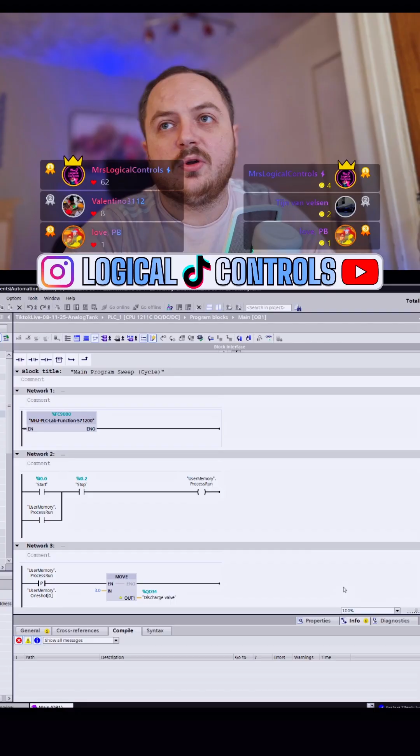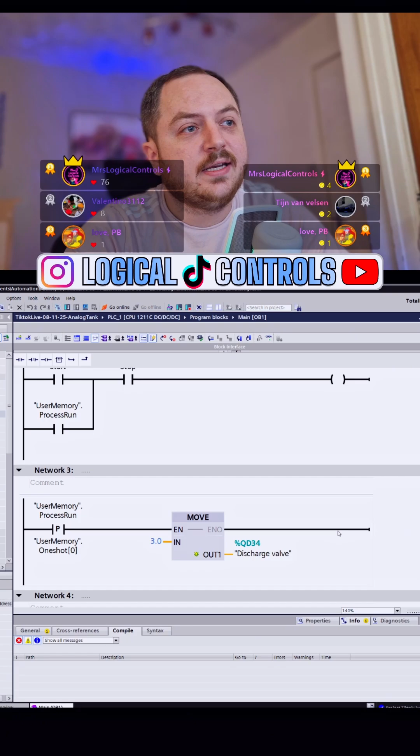So what I've done, obviously we've got factory IO running - not that view, this view. Yeah, so we've got it running. I've also got TIA portal in the background with the Siemens program. Let me zoom that in a little bit so you can see better. This is the program we made last night. After like 2 hours of trying to get the PID to work, we gave up on it in the end. But there's a reason why it didn't work, and the reason is PLC sim. So while we're talking about that, let me run PLC sim, because I haven't got it running yet.

It wouldn't work, and there seems to be some sort of bug with TIA portal. One of the followers, Paxir Electric I think he's called - Paxir, I'm not sure if I'm pronouncing that right - but he found out the reason why, and he let me know. So I really appreciate that.

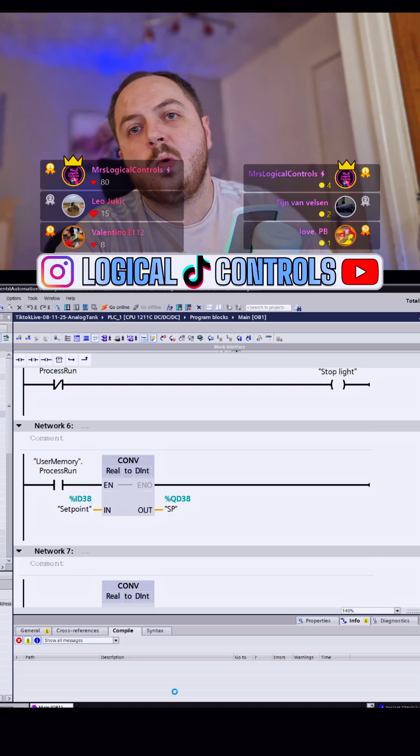So let's run up the sim. Connect. Let's load. Start module.

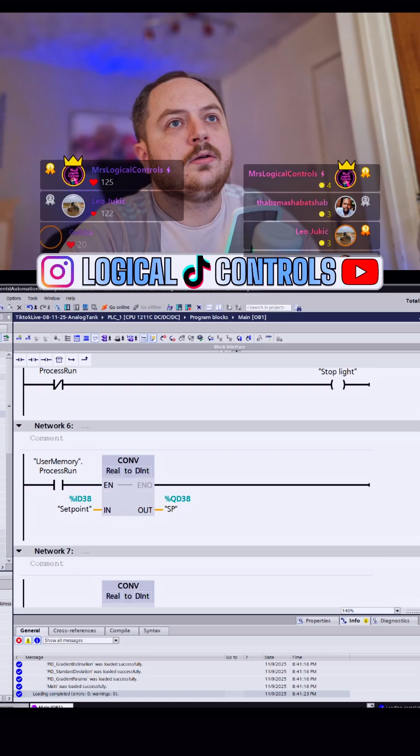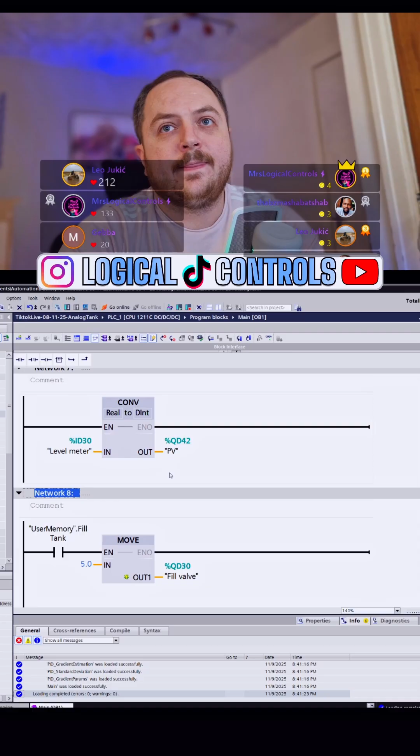Appreciate that. So Paxir, he found the solution to why it wasn't working last night. Last night we just ended up doing some rough control just to get it working, just to put a pin in it. But tonight we're going to bin this off and actually do a PID this time. And I have tested it, so I know it does work.

There's a few things we've got to change in here though. So we're not going to need that. We're not going to need that. We're probably going to change this - I want to scale it properly. And we'll probably change this as well.

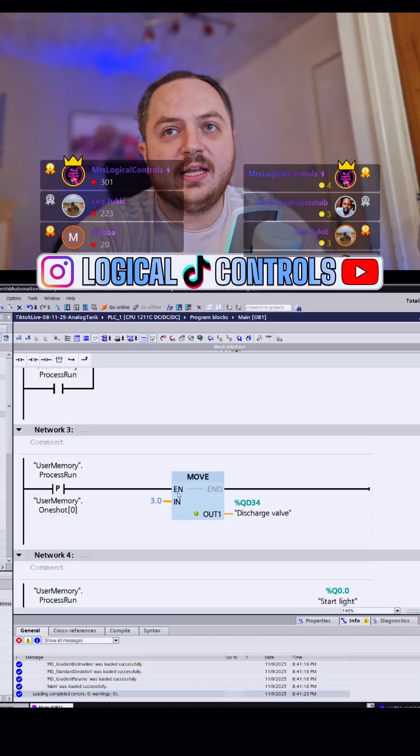Right, so this here, we're going to leave that - we're just going to have a constant discharge. On the sim, there's this drain hole down here, with a valve on it to basically plug it or unplug it. We're just going to leave it 30% open, so it's constantly draining, same as what we did last night, no different. But tonight we're going to get the PID working. We didn't do that yesterday, and it was a bit of a thorn in my side.

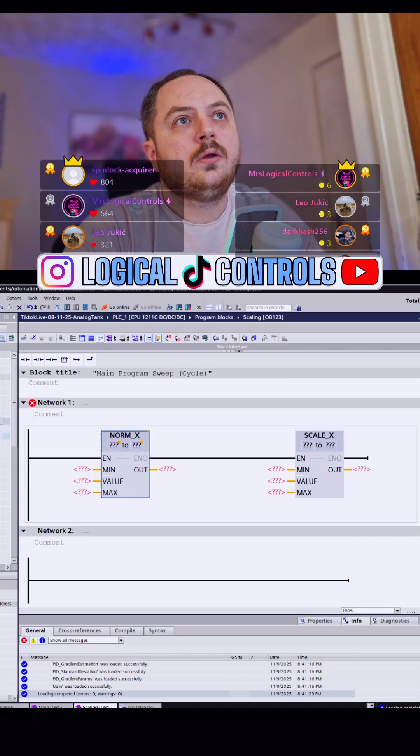Right. And it's a real, we're going to keep it as a real. The minimum is going to be 0.

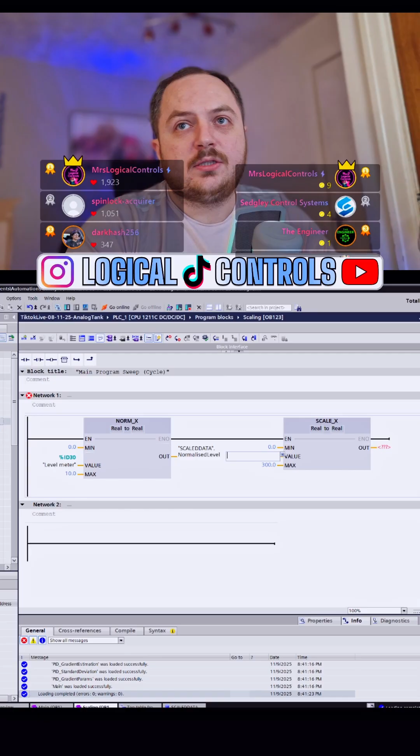Right. Let's maximize that. Okay, so yeah, that gives you an idea of what we're doing. So this one wants to be normalized value, scale data, normalized level. There we go. And we're going to put that into scale data, scaled level.

This value in this box is going to be - you can't see it again, hang on. Can you see that a bit better? I've obviously messed around since last night and I've got the view not quite right. Right, I think you can see all that now. So this scaled level variable, that's going to hold the value of 0 to 300 now.

Which ties up with the scaling of the actual tank, which I'm assuming is like, I don't know, 300 centimeters or something, or 300 inches. I don't know what the actual scale is, but yeah, that's the height, I guess - the height of the... Oh, it's centimeters. Yeah, so it's a 3-meter tank.

Okay, so we've scaled that.

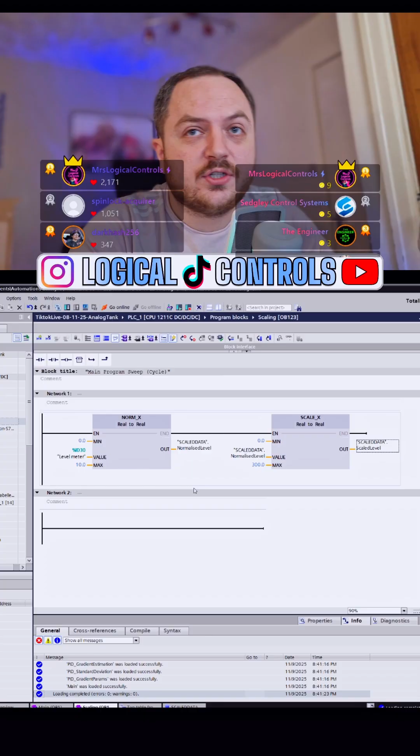Yeah, it's centimeters. I'd call that set point value. This isn't the set point, mate. No, this is the feedback from the level meter.

So let me just copy that so we don't have to do it all over again, and bin that one off. So let's call that one scaling of the level meter. We're going to call this feedback for PID.

This one's going to be scaling of the set point for PID. We want to change that so it's not level meter anymore. It's, excuse me, set point, which is also 0 to 10.

That becomes set point. That becomes set point, and that becomes scaled set point. That probably doesn't actually want to be 0 to 300.

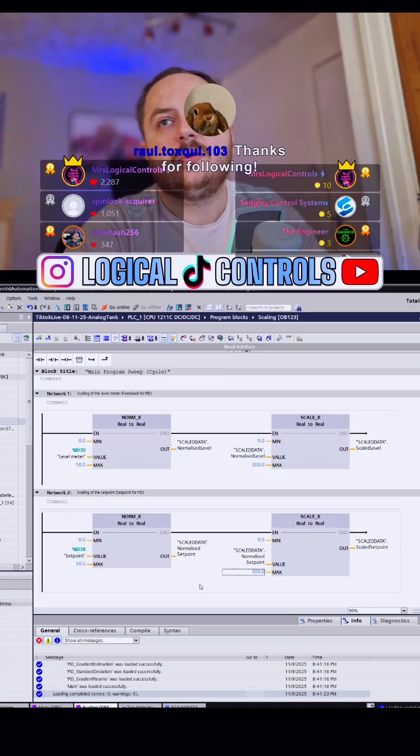No, we'll leave it. We'll keep all the variables for the PID the same scale.

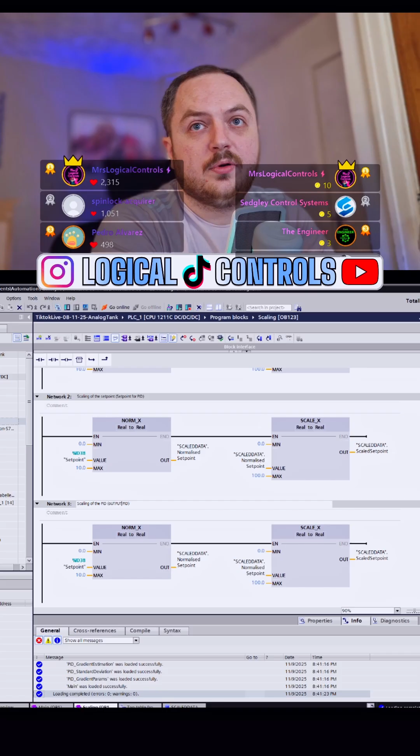So let me copy that, paste that. This one's going to be scaling of the PID output. It'll be 0 to 100 because the actual PID gives out 0 to 100%, or at least that's the way I'm going to do it anyway. This is the output from the PID, scaling of the PID output. I guess it's a little obvious what I'm doing, but I don't have it yet, so let me just take that out for now.

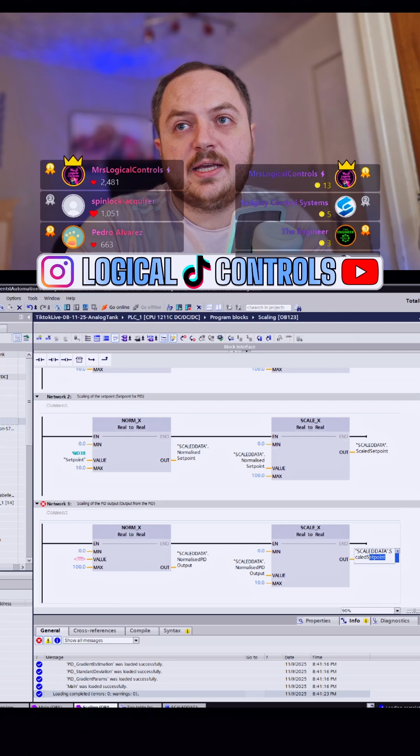This is going to be 0 to 100. We're going to make it 0 to 10 because that's what the fill valve requires - it requires a 0 to 10 signal. We'll call that one normalized PID output, and scaled PID output - not set point, there we go. We'll leave that blank for now because I haven't added the actual PID yet, so I just don't have it.

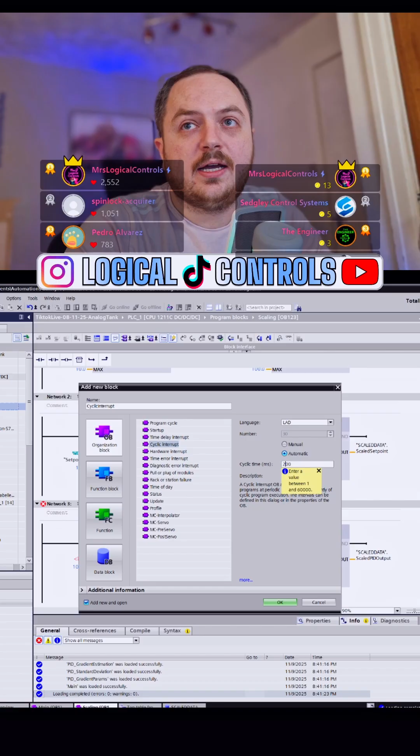So let's add a new block. For the PID, that wants its own OB and it wants a cyclic interrupt. Earlier I had to set that to 200 milliseconds because I was getting errors at 100.

Okay, so we've got a nice new block. This is going to run every 200 milliseconds. Over on the right, I don't know if you guys can see that - let me pull it across. We have some blocks, and one of them under technology is PID control, so I can open that up.

The problem I have, or the problem we came into last night - we're using the compact PID, that's what we're going to use, just because I think that's the easiest one. I'm not entirely sure what the others do.

The problem is this says V6 here. We were using - oh, you can't see it, let me pull it across a little bit more. We're using version 6, that's the latest version of the compact PID. That does not work with PLC Sim at the minute, or at least it doesn't appear to.

So what you need to do, and what we didn't do last night, I would have never known this - I'm not like a TIA expert or anything, I'm only just kind of learning this stuff. Apparently version 5 doesn't work. I don't think version 4 works either, or at least the one I was told by Paxir Electric was 3 works, and I have tested this. So I'm going to use version 3, and that takes the actual block itself to version 1.2.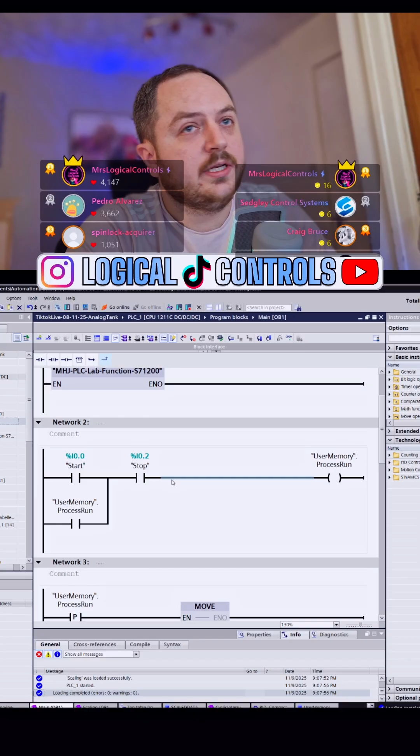Just to show you what process run is. Basically, we've got a start button on the control panel, we've got a stop button, and we have the process run bit. When we press the start button, it's basically just going to latch in, and process run's going to keep running until we press the stop button. The stop button is physically a normally closed contact, so we have to use a normally open contact in the ladder.

As I said, I maybe should comment some of this stuff. So this is the control start stop. This is our constant tank drain. So like I said earlier, the drain is going to drain the tank with the valve being 30% open.

Which country am I from? I'm from the UK, mate.

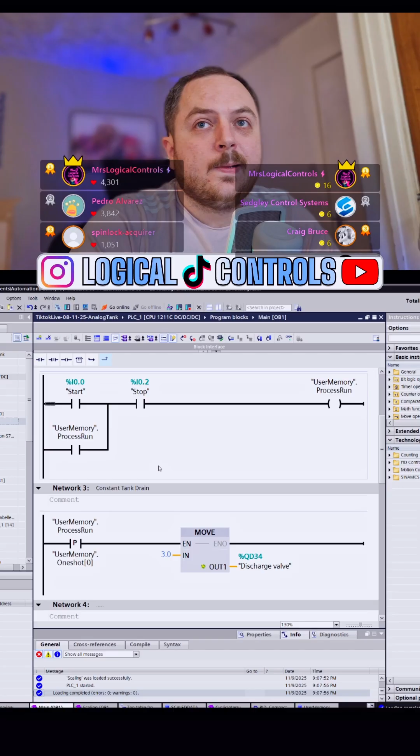How should I start learning PLC programming? I've got a whole video on that that I made a couple of weeks ago, called Low Cost Methods for PLC Programming or something like that. Have a look at that, Robert. I could tell you all the information now, but there's visuals to go with it.

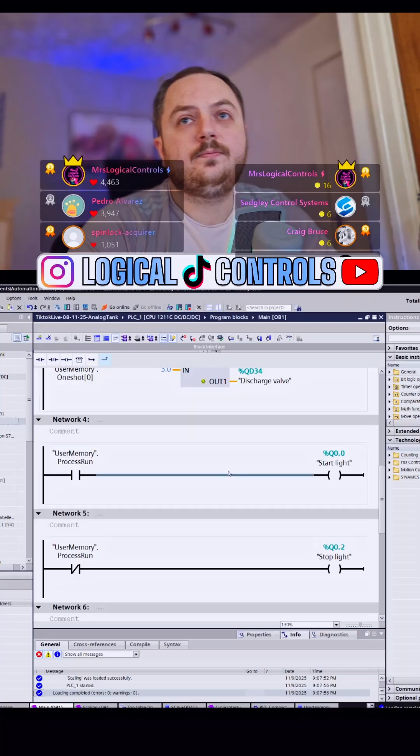Okay, so yeah, that's the constant tank drain. Just to remind you, the tank has a drain hole, it has a valve attached to that. So if that valve is fully closed, nothing drains out. We're going to leave that valve 30% open, so we've got a constant drain, because the PID is no good unless there's some sort of force acting on the system. So we're just going to have a constant drain, so we'll be able to maintain like 50%, 60%, whatever we set the set point to.

Okay, so this bit here was just basically for the panel start lamp. This is for the panel stop lamp. The panel stop lamp in Factory IO is totally rubbish, it's a black lamp, you can basically never see it come on, or it's very difficult to see. This white one will get a bit brighter.

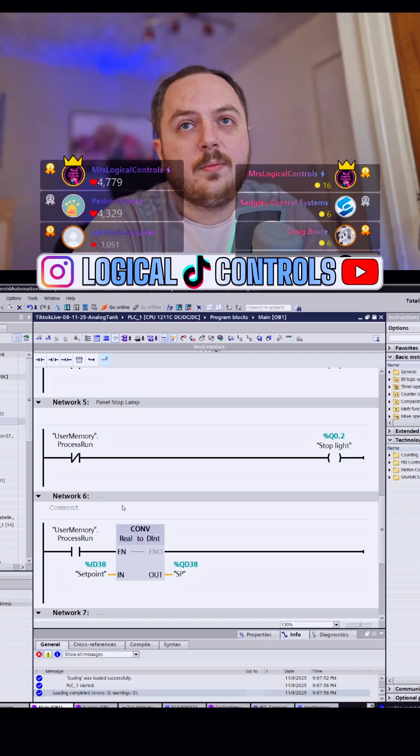Okay, so just to give some comments to this logic that we've done. What was this? This was basically, we're going to change this, but I'll comment it anyway. This is for the SP meter readout on door. I'll show you what they are for. What was this one? PV meter readout on door.

We'll change this because I never really liked the way I did this yesterday anyway. So we've got 2 meters on the door, SP, PV. SP is obviously the set point, so this will give us a digital readout of what the set point is set to. The PV is the actual level that the tank is. So for now, we'll leave them as they are, but we are going to change them. It's a bit of a minor thing, it's just more scaling, really.

Did I make this simulator? No, I didn't, mate. A big company made this, I think they're called Real Games or something. I think Factory IO started off life with the intention of being a game, and then they realised they could make an absolute shed load of money by selling it to industry. It's not free, buddy, no, it's not free. You can buy it on a subscription, so you can pay a monthly fee of £28, which, or is it euros or something, which isn't cheap. Or you can buy it outright for like 700-ish. This is called Factory IO, so it's a simulation tool for industrial automation.

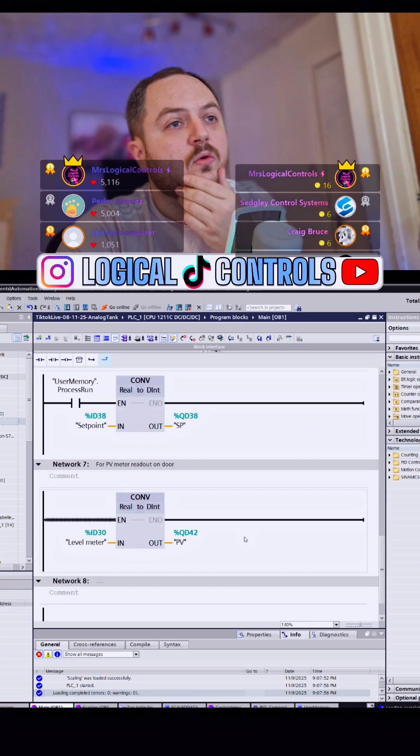So EN Squared, what you'll need to do is have a look on the website for Factory IO. They give you a template program. As part of that program, they have a function, FC, if I show it in the main, right at the top, FC9000, they put this in, which has a load of structured text in it that does something to make the communications work. I'm not entirely sure of what all this is, but you need that in order to get the comms to work. The easiest way to do it is just download their template program.

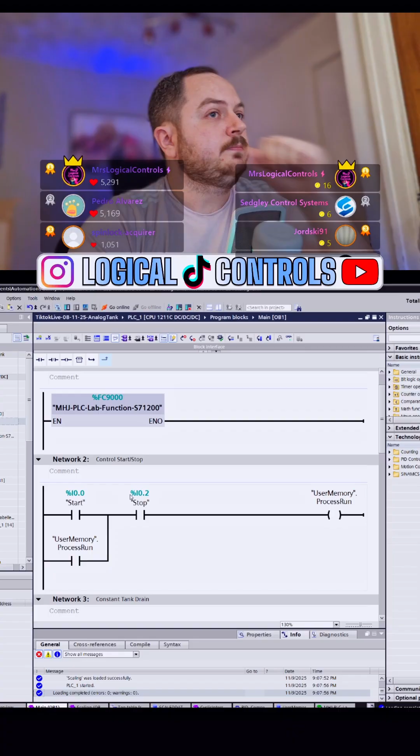Okay, so what was I going to say then? Yeah, PV, the readouts on the door, we'll set them up later.

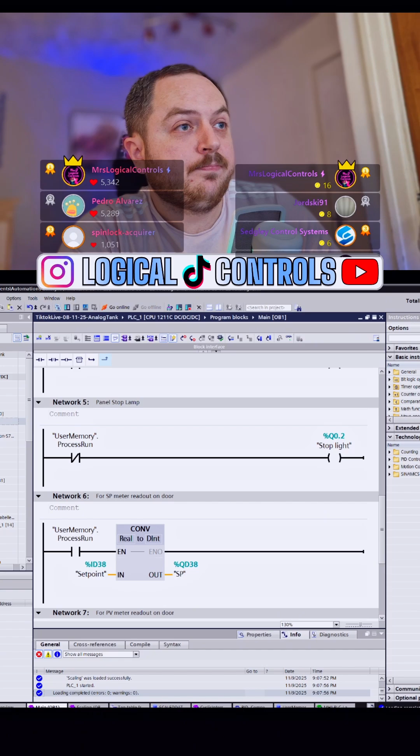Really appreciate it. Okay, let's write this, and we'll get going. We'll get tuning, that's the hope anyway.

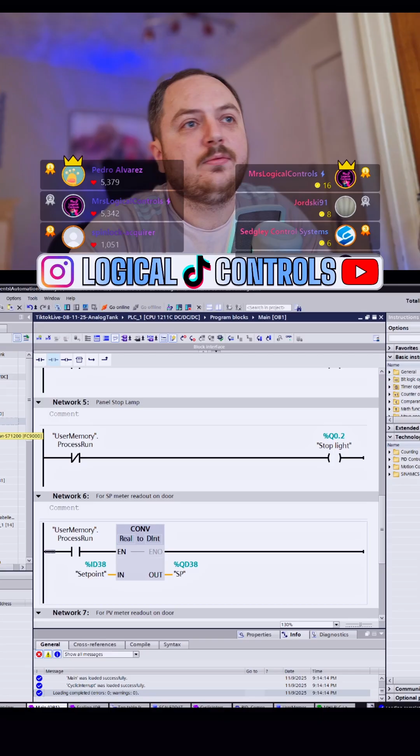Yeah, I was pulling my hair out last night trying to get this to work, and it turned out to be some sort of bug. So yeah, we're downloaded now, I believe.

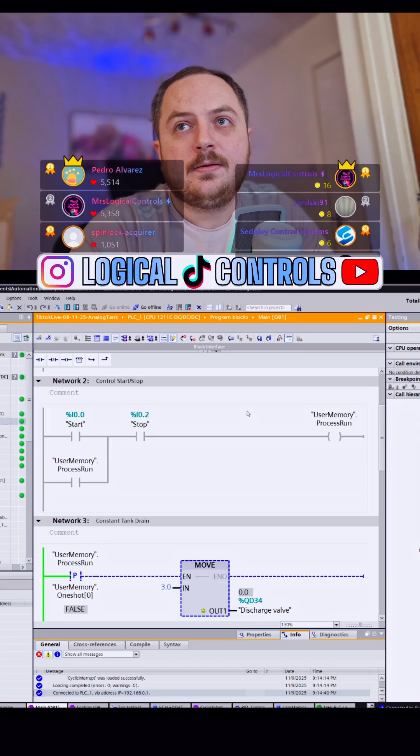Let's go into the simulation. If I press the start button, I have to run it first. I press the start button, run this. That didn't do a right lot.

Are we running? PLC Sims running. Why is it not running now? Let me just do another download just in case.

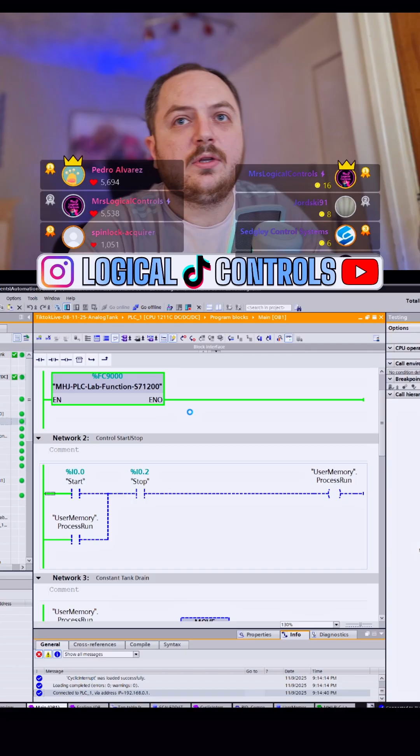I haven't connected it, that's why, I'm an idiot. You need to connect it. There's a button up in the top right, you can't quite see it, but it does say connect. Now we're connected, that will make things easier.

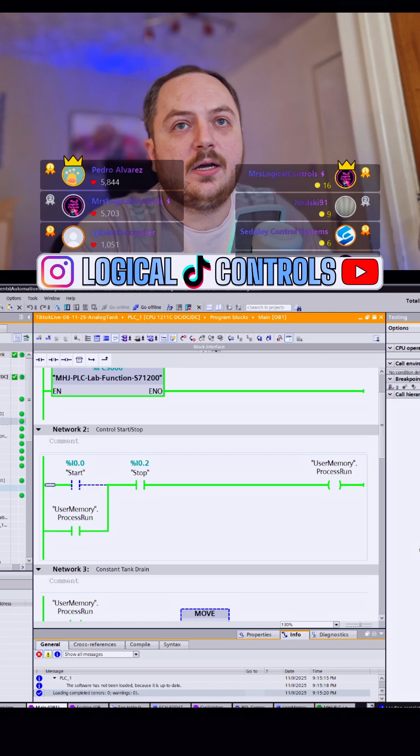So I pressed the start button, that little light got a little bit brighter. The panel lights aren't great. So now we should be running. We are. Let's go to our PID.

Thanks for the follow. And I want to go to the commissioning one actually, so go back. So this is the commissioning screen. I think you can just about see it. Try and put it a little bit better in view.

I'll start measuring the PID, the sampling time. It's not happy about that. I think if I start it anyway, it will just do it.

Can I change them now? Not at the moment. So thanks for the follow.

I've lost it. Where's my commissioning screen gone? Alright, it's at the end. There we go.

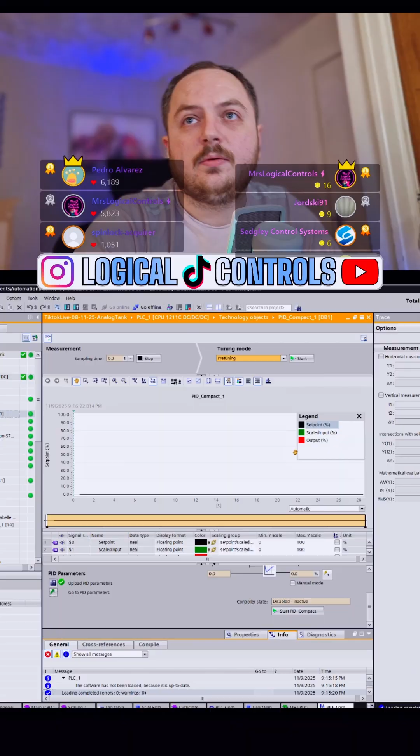Can I just start it? Right, I can just start it. Tuning hasn't started yet, I found the tuning not to work very well. The set point's showing 0.

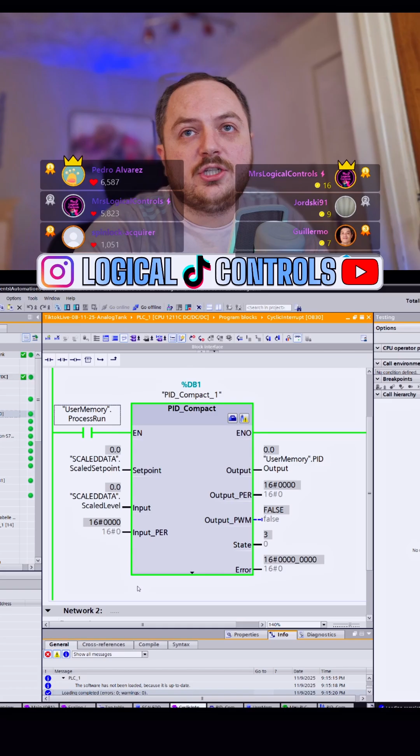Okay, so let's have a look at why my set point is showing 0. It probably is showing 0 because it is 0. So my set point is this potentiometer on the door, I want to set that to around 5, which is halfway.

We are now seeing 50. We're now seeing an output, so it's kind of running. Might not run very well. Well, it won't run very well because it's not set up yet. But you can see the output is starting to do something now.

If I can, there's one of these, let me zoom in on that portion. So you can see we've got a set point of 50%, that's what the set point is. The output is now increasing, increasing. You'll see in... no, you won't see in the...

Ah, okay, I found something I've not done. I haven't mapped the PID output to the fill valve yet.

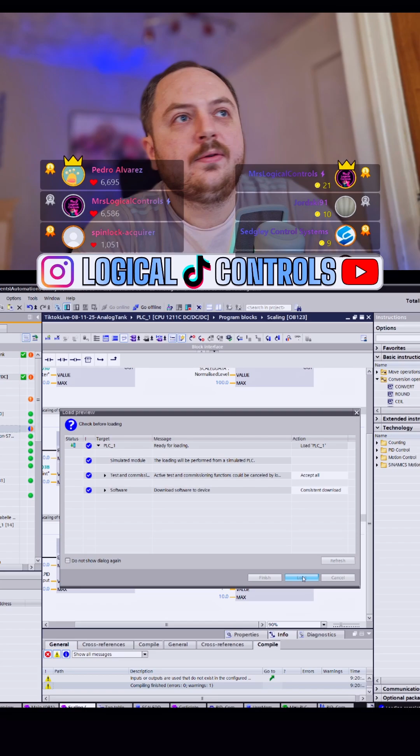And then we're going to see the tank start to fill. It won't fill very well because we need to tune the PID first.

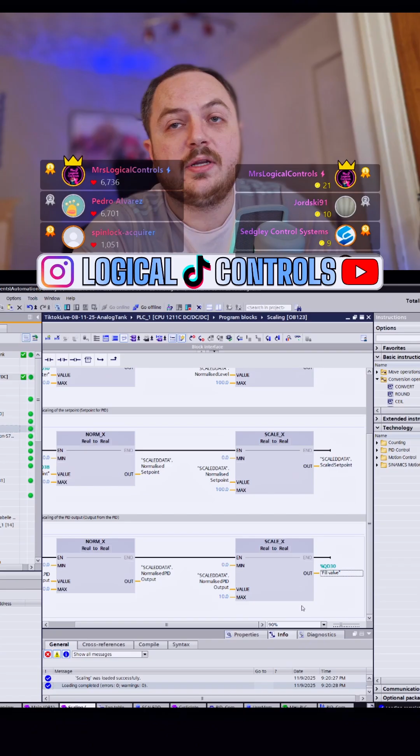Really appreciate it guys. Okay, so we should be downloaded now. I definitely downloaded it, didn't I? Yeah, I think so. Right, so the fill valve's coming directly off our scaling now.

Guys, don't use a Mac to live stream. Dixon Mays - oh, I got done with the Dixon. I also got done with another one, but it was a little bit closer to the edge, that one. I think it was like my second or third live stream. Someone basically said, what was it again, Mo Lester's got a really good YouTube channel, and I was like, oh yeah, Mo Lester's got... Yeah, I shouldn't have said that.

Do you also use Studio 5000? I don't mate, I don't.

So let me go back into this. I'll press the start button now. I don't think we were. Let me stop and start again. Puck Whisper says couldn't be bothered to sort it tonight. Ah fair enough mate, yeah it sounds like a headache. It does sound like a headache.

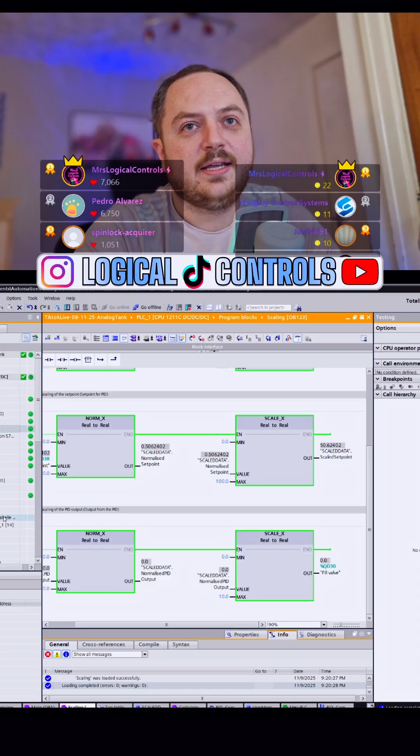So we need to start the PID. Go back to the commissioning screen. Let's start the measurement from scratch. Start the PID. If we go to this and this, we should start to see that output increasing, and we should start to see some filling, which is what we were struggling with yesterday. The PID was giving no output.

Hi, this is my first time - which PLC is this, and do you organise formal training on it? This is a Siemens S7-1200 PLC. I don't do training, to be fair buddy, and I'm definitely not qualified for doing any sort of Siemens training because I'm just kind of learning it myself.

Appreciate whoever is sending those gifts. Balint, thank you. I still haven't sorted out why that keeps repeating either, in fact it's really annoying. Let me just turn it off a second. It's still going, it's still going. We're just going to have to bear with it. I need to fix these overlays, I need to fix them.

Are you working on PLCs for water treatment plants? I do work - I work in power generation mate, so I do work at water treatment plants. Oh, can't even say it. But it's more on the generator side, on the backup generators and that sort of thing.

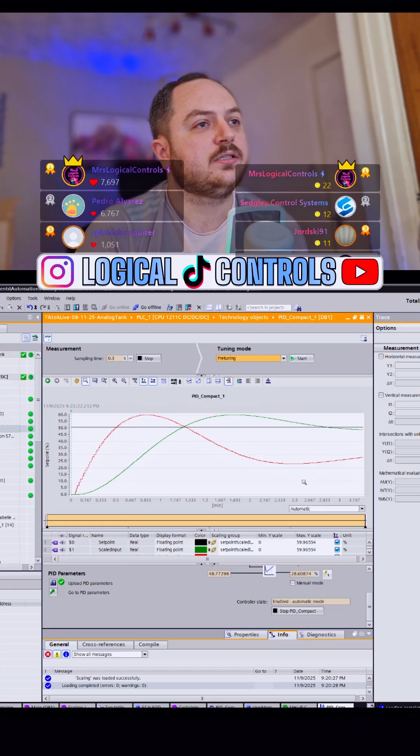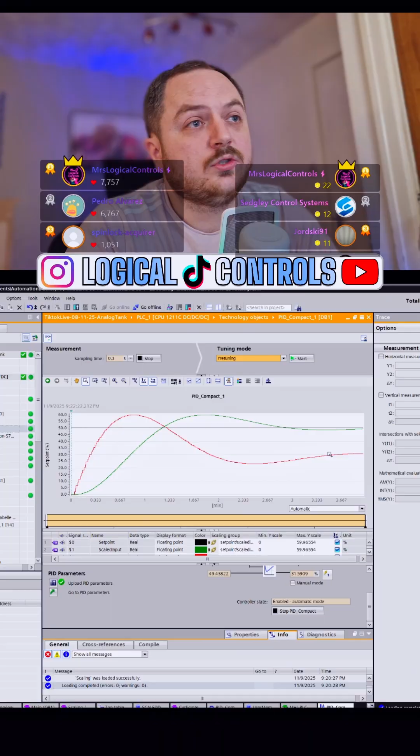You're automating the process of adding peroxide to intensive feed. I mean, that's something I don't really know anything about, to be fair, mate. Like I say, I work in power generation, so all my knowledge and expertise is around synchronizing generators, automating mains and switchgear, power management, hybrid systems where you've got diesels, hydro, solar and wind turbines, and managing all that. That's kind of my expertise, but I can program, and as part of that we do a reasonable amount of PLC work. So stuff like what you're saying there isn't my expertise. I can maybe help with some of the programming side, like give some advice on how to do certain control and stuff, but the actual process I wouldn't know anything about, mate.

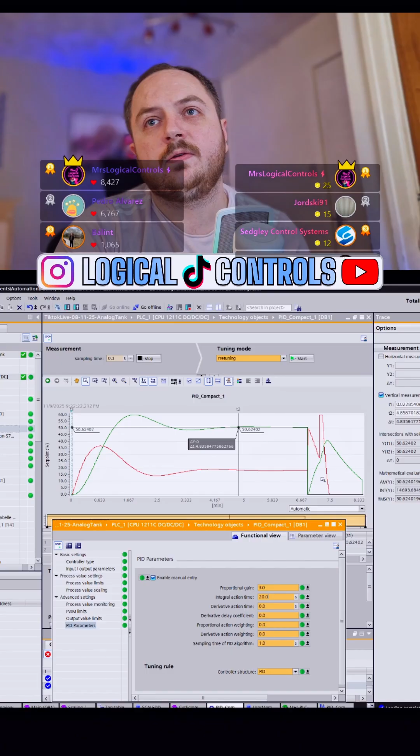Let me do it from scratch. I'll just press it and see what it does. It might not even like it. So I tried the auto-tune, but it just weren't having it. No, it won't do it, there's some errors or something. Let me restart the simulation again. Maybe I need to turn it off first. But when I tried to tune it earlier, I did get it tuning, I did get it working, but it was rubbish.

Is that a PID controller? Yeah, so that's what we're setting up at the minute. It is giving me an error, I'm not sure what the error is for. Let me just upload those. Error starting pre-tuning, the process.

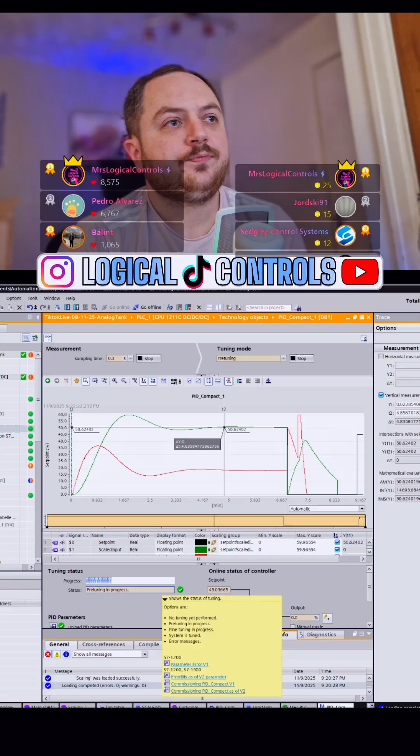Ah, the set point, is the set point gone back to 0 since I restarted? Probably, let's set that to 45. Try that again. Right, pre-tuning in progress. It definitely didn't work very well earlier when I did it. Fine-tune will... you probably need to fully parameterise the PID block for the pre-tune to work. Ah, is that why? Possibly.

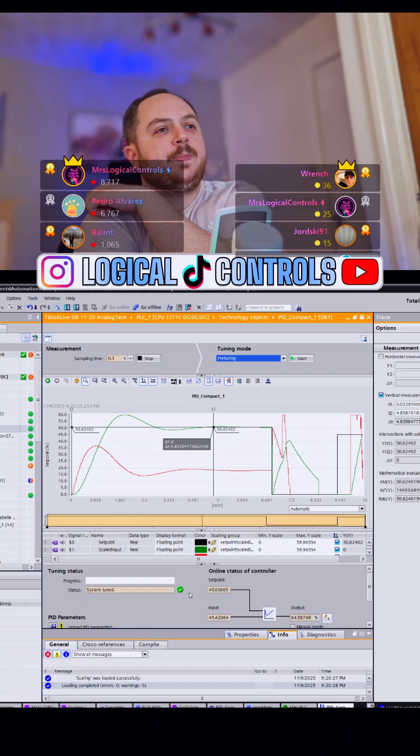Keep KI at 0 and start with KP until it oscillates. Thanks for the follow. Well, we're gonna try this tuned system, but yeah, this basically looks like what it was doing earlier. It's very choppy, it's very on-off, and in my mind, that's not really what it should be doing. Nah, just temporary, on arcade, buddy.

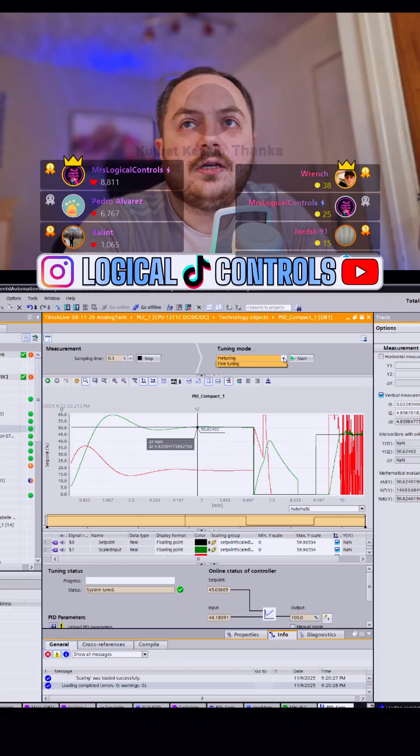Is that right? So if I did a fine tune, would that work? Fine tune in progress. Nah, it's not happy. So this is the error I was getting earlier when I tried this. It was basically not happy that the cyclic interrupt was 100 milliseconds. Then I put it to 200 milliseconds, and it's still not happy now.

Yeah, I'm not sure. It must have stopped, it got to 2 bars and then I got the error. Yeah, I don't think it's doing it anymore.

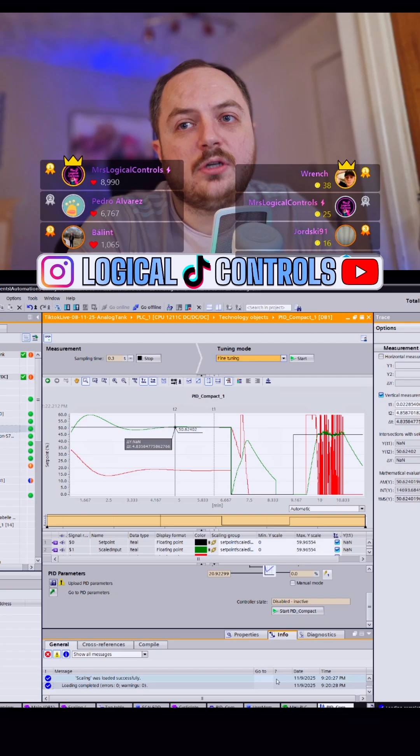So yeah, I'm gonna go for a manual, I think we're just gonna do it by visual, really. Which colour is process and which one is CV? So the black line is the set point, the green line is the feedback, that's the PV, and then the red line is the output, which is MV. Is that right? Yeah.

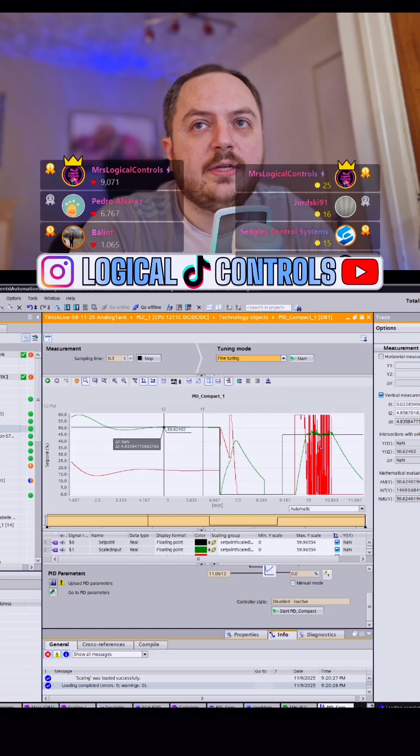The tuning didn't work very well, so let me bring the commissioning screen back. I think that's that one. I think we need a relatively low gain. Let me turn that off.

Our tank level is continuously dropping. At the minute, I think the PID is actually just faulted out, it's not starting.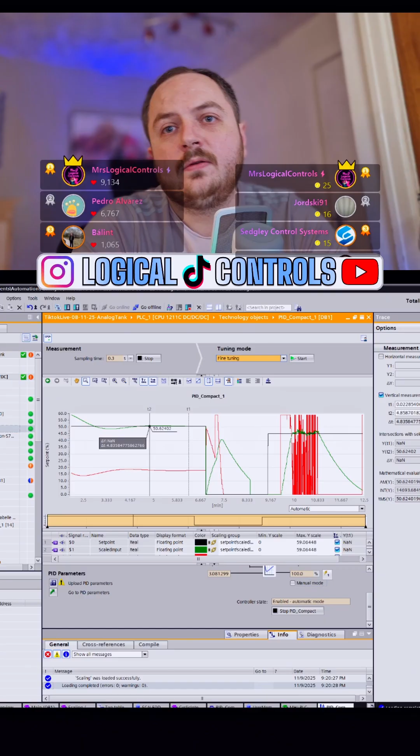Appreciate that, thank you. No, this isn't MATLAB, mate, this is Siemens TIA Portal.

El Papi, to be fair, I don't do PIDs enough to know or remember. You'd have to be using them fairly regularly to remember the different methods. I tend to just try and do it by eye, by feel.

Seems to have reached its sort of limit there. So if we add in some integral, that's the error over time. It slowly adds output because the error hasn't changed over time. The longer the error is still there over time, the bigger the output's going to be.

So again, for those just joining, the red line is the output of the PID, and the green line is the feedback, so that's the tank. We are filling a tank right now. This is the simulated tank that we're filling. It has a constant drain on it, like a plug hole in the bottom. Fluid is coming out, and we're replacing that fluid to basically try and maintain around 50.

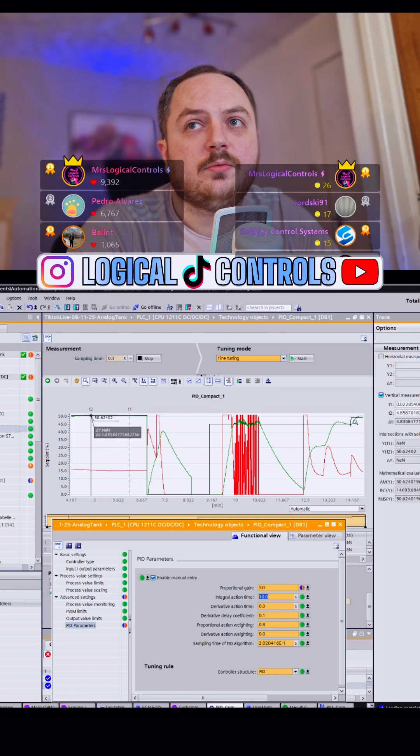There is a way to basically just show that portion, although when I do that, I have to kind of manually move it myself, which I don't like. So let me just stop it and start it again. And if I go to that one and that one, those two... oh, I appear to have broken it. One second. Oh, it's not even those ones, is it? It's that one and that one. That's what I'm looking for.

Apologies, so yeah, red line is the PID output, green line is the feedback. So what we want to see is the green line basically going to 50 and staying there.

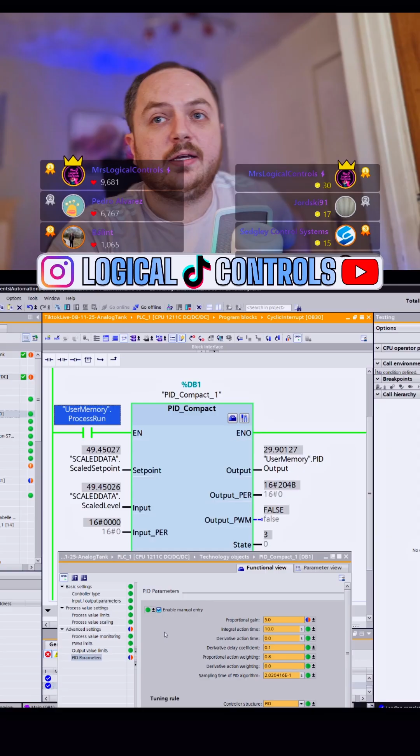So yeah, we're slightly under, but that's not too bad, that is not too bad. As a PID, it's not very quick though, so maybe we can play with it a little bit more. I am running out of time though, this is a short stream tonight. Just kind of, the main idea was to kind of just get back to what we did last night.

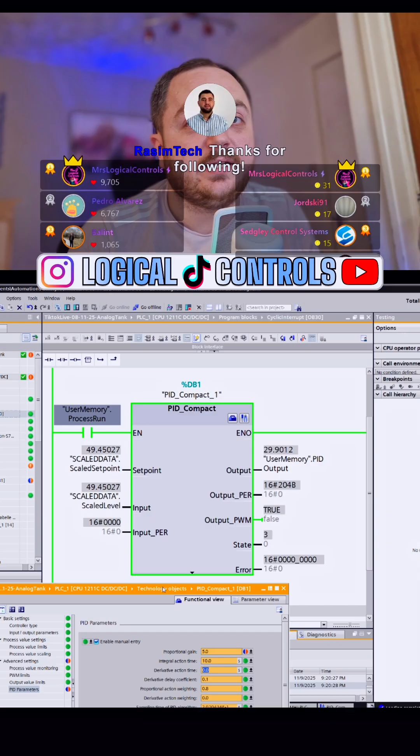Clear the reason why it didn't work, because there was a lot of people in last night trying to get the PID to work, and it turns out it was nothing that we were doing. It was just some sort of bug that exists in PLC Sim.

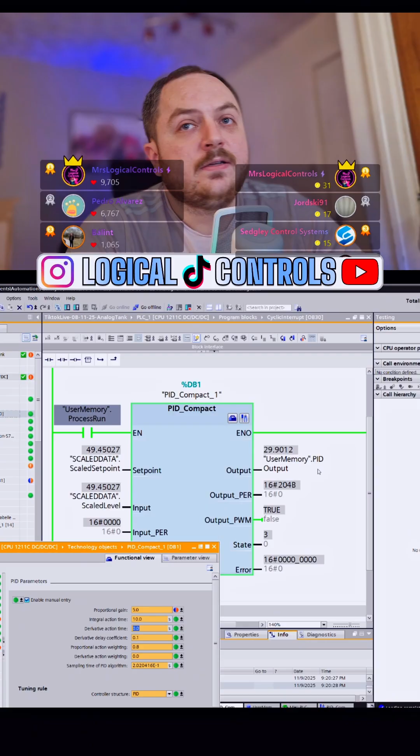So this software here is Siemens TIA Portal. This software here is Factory IO, which is a simulation software. So what I'm doing is I've got TIA Portal talking to Factory IO. So my software, my PLC programming software, is getting values from Factory IO and giving values to Factory IO in order to run the simulation.

That is absolutely spot on. You see the green line is sitting right over the black line now. There was a little bit of overshoot, a tiny little bit of undershoot, but in general, that was reasonably set up.

We're not even using D. This is just a PI controller at the minute, PID in the interrupt program, OB30. You probably can't see that, in fact I can't even show you that unless I move the whole of TIA Portal across. So that is where the PID exists in OB30.

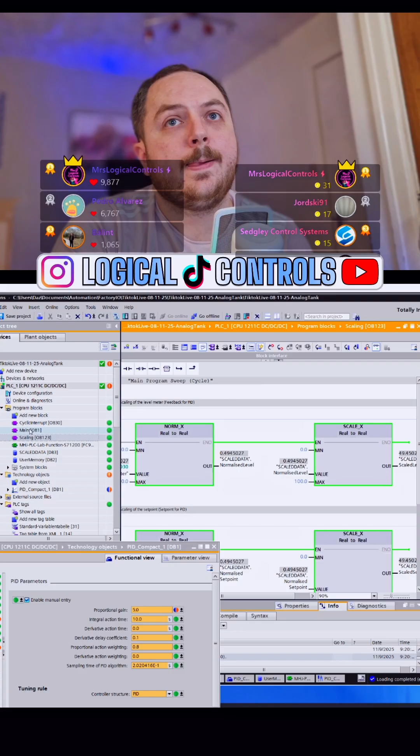We have a main which is doing some other stuff. I created this scaling one just for the scaling that I needed to do.

Which TIA Portal version is it? So this is version 20, but one thing you do need to know is this PID compact block that I've used is version 1.2. I think the current one is something like 2.3 or something. That doesn't work with PLC Sim, so you have to use 1.2.

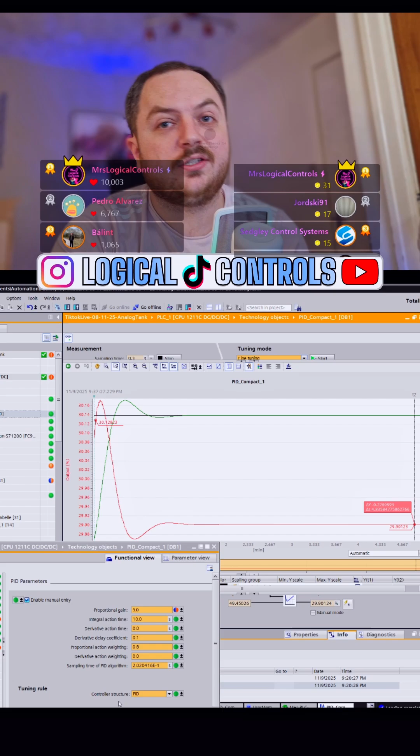There is always overshoot or undershoot. You can program that out, make it so your ramp is perfect. It just takes a bit of fiddling around. But in fairness, for what we're doing, this tank, the overshoot probably took it to like 55, 60 or something, but then it came back down and it's maintaining perfectly. There's no wobble, it's perfectly solid. So in real life you can get it so there's no overshoot. You just need to set up your parameters right, because you don't have to make it fast acting. You can make it much slower acting, and it'll just slowly creep up.

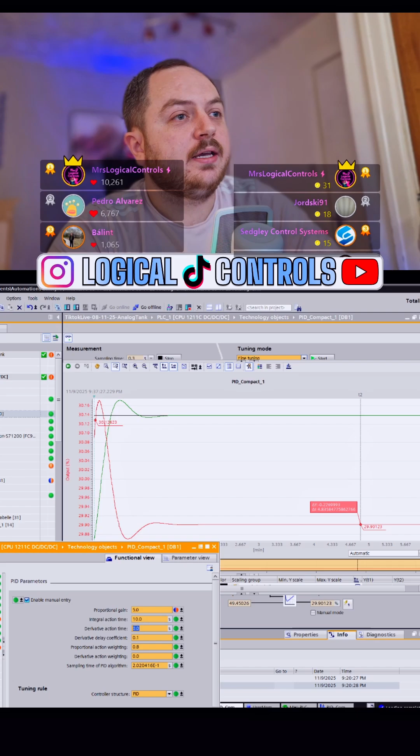Hopefully that's useful to some people, especially if you were in the live last night when we just could not get that PID to work. We ended up doing some other things, I put the video on earlier, like a highlights clip of it, where we used basically on/off control, and it just maintained between 45 and 55%. It was on at 45 till it got up to 55, then it was off, then it drained, and it was just kind of jumping between 45 and 55. But now we've got perfect control and it's just sitting there maintaining.

Obviously in the simulation it's not quite right. If this was real, you'd have splashes and stuff, ripples in the liquid and the fluid and stuff. The simulation only really shows that if you're on/off.

Well, just shout out once again, I don't know if he's still in here, but Paxir Electric, PAXCIR.electric. He was the one who discovered why we couldn't get the PID working. I think what he said was he's doing this for real as part of work, something very similar. And the day before yesterday, he was struggling with this, and he found the answer.

And the answer was basically to use, let's go back to it, version 3 of the PID compact. So I was using version 6, that's what it defaulted to. I don't know TIA Portal that well, so I didn't even know you could change versions. But version 6 does not work with PLC Sim, it'll work in a proper controller, actual hardware, but PLC Sim doesn't like version 6. You have to go to version 3. That's why it wouldn't work last night.

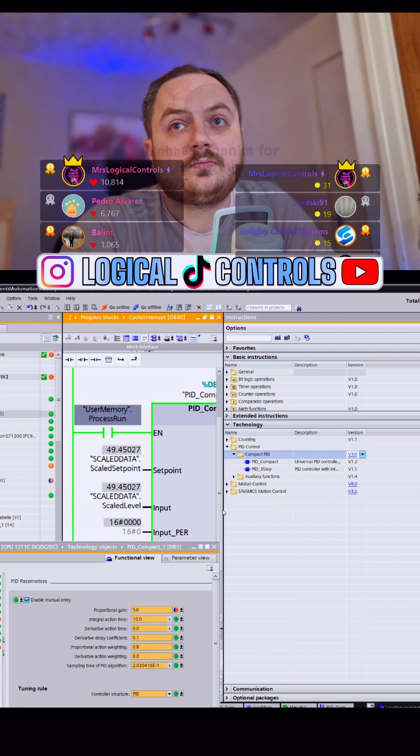So that's PID control. I can change the set point now. Let's actually see, because although its steady state is great, how does it change with changes in the set point?

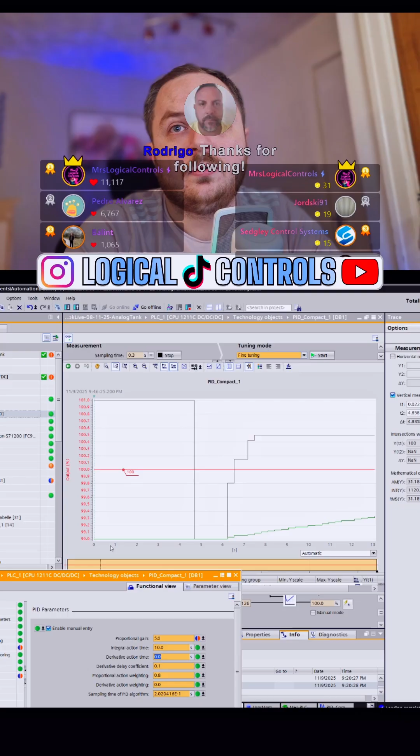Is that showing 0 now? I think, yeah, that's 0. Is it? Zoom out, zoom out, zoom out, zoom out. Oh, that's zooming in, my bad.

I'm confused by the graph here. The scale's set to red for some reason. How do I change that? Ah, that's better. There's 0.

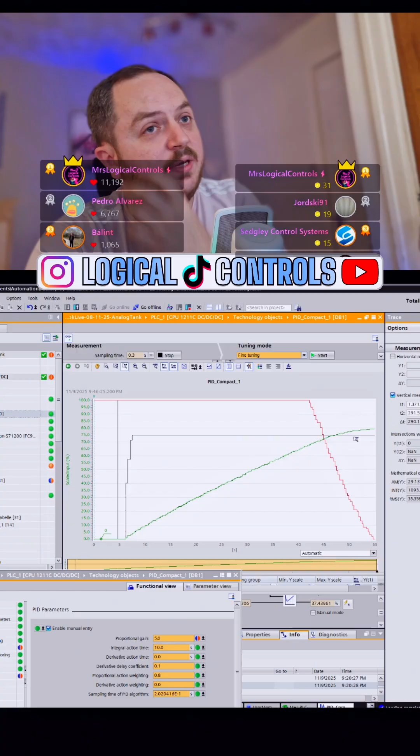So what we're hoping to basically see is this green line should just go to this black line. There's a bit of overshoot, a tiny little bit of undershoot. But what I wanted to see was the graph at 0. And then we can start changing the set point, and we can see how it behaves according to changes in the set point.

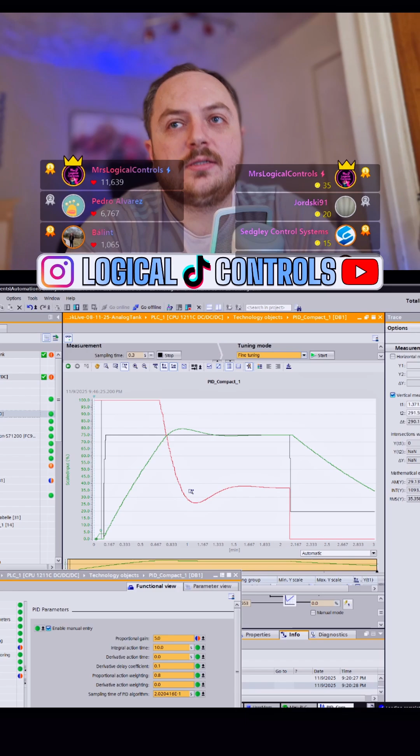Right, so it's just coming down, can have a quick look at the graph. The green one is the feedback. The actual output is set to 0 at the moment, so the valve up the top is completely closed. That's completely closed, we're not filling whatsoever, you can see there's no stream. But as we get closer to 20, it should start opening up again. And there we go, I can see a little stream now, and that's going to get bigger and bigger and bigger as we get closer.

And let's look at the graph. There's going to be a bit of undershoot, I imagine. But you can see it slowed right down. And then it will start to go up a little bit more again.

Good luck, mate. Been doing automation for 6 years now, 6 years now as a full-time job. It's fun. Nice, mate. Yeah, I don't really work with factory automation, but I do work automating power systems and stuff like that. So yeah, I enjoy it. This is the sort of thing I like and love, sort of thing, got a passion for it.

Us old people, you're right, Jordski, we are getting on. Although you're 91, I'm 93, so you're even older than me, mate.

Yeah, there we go, it works well. The PID works pretty well. I'm quite happy with that.

I help run a company that makes HMI and PLC here in the States. Nice too. Yeah, babies, yeah. How old are you, Ash? Out of interest. Jamie, thank you for the follow, appreciate that.

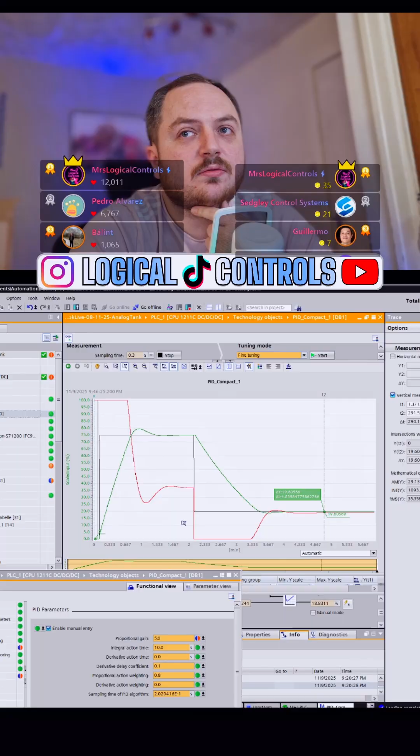Yeah, last night was a bit of a nightmare, but I'm glad we've sort of resolved this. I can close it out now.